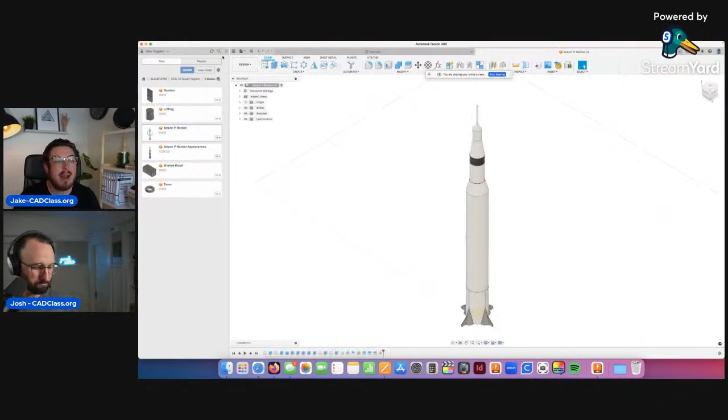So I'm just going to pull up the Saturn V rocket - that'll be in chapter 0. Let's get started. I believe what they were asking about was when we're making the sketch of the fin down here. I'm not quite sure which sketch it is, I believe it's that one. There we go.

So when they were doing their sketch, they noticed that with two vertical dimensions, sometimes the number is on the left-hand side and sometimes on the right. Anytime you're making sketches you'll give to other people, or that you may review in a year's time, you want everything as neat, tidy, and organized as possible, so you don't have a random sketch that's hard to read. With horizontal dimensions they face the right way, but vertical ones look a little skewed left and right. So what's going on with this?

I actually don't know about this, and I recommended they rotate their entire view and try it again. But I haven't done it myself, and I figured this would be a fantastic live experiment. There are always tiny tips and tricks in Fusion that I have no idea about, so we may as well do it on a podcast.

I'm going to delete this 26mm dimension, then close the sketch palette because nobody uses it. This may be a little trick if you don't know about it: if you go up to the view cube, there's a house icon, but there are also arrows where you can click and rotate your view, which is nice.

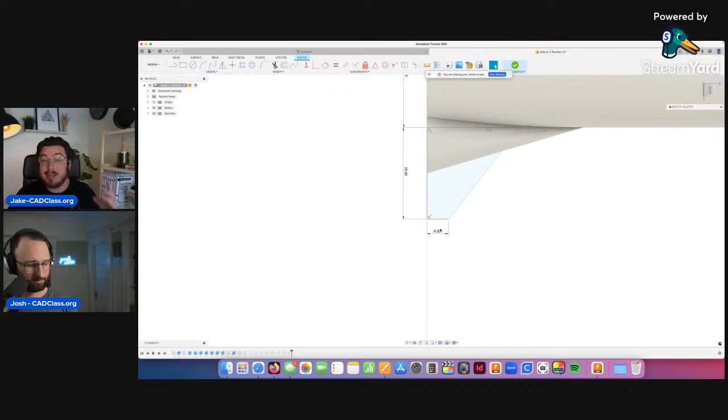What I was recommended is to flick the view over, so now your number is horizontal in the right dimension. Let's try this out - hopefully when we flip the view back, it should stay. Let's move this down to 26, hit enter, then click back the other way... it flips over. Really strange. Let's try that for the 6, see if it does anything. This is something I have absolutely no idea why it does this. Weirdest thing - can you think of what happened, Josh?

What? No, I don't know either. It just flicks, super strange. Obviously it doesn't affect the sketch or the dimensions of the CAD at all, but really, really weird. Very strange, right? Yeah, I don't know what's up with that.

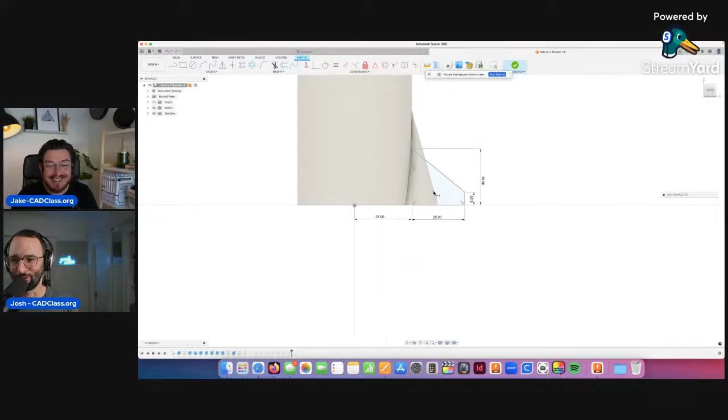But it did kind of lead us to eventually making a bit more of a YouTube video about this content. There's a bunch of tools in the ViewCube that a lot of people don't utilize as much as they should, so I figured we'll spend a little time going over a bunch of the different tools in here that maybe you don't know about.

Going over. So obviously, when you look at the view cube, you can click the little house icon to get isometric view. This is the view you want to go to when you're going from a 2D sketch to a 3D object. If you imagine extruding a square and looking directly downwards, you have no idea if it's exactly the dimension you want, or if you accidentally double-clicked a number and it's now gigantic, because looking straight down it looks exactly the same. But if you look at it at this isometric view, it's way easier to see the scale of things.

That's pretty common. Then a lot of people know that you can click all the words on here. So if you want to click where it says front, it will give you a front view. That's pretty obvious. You can also click on the edges of our view cube, and you can also click on the corners.

Like I said before, you can also click on the arrows to change your view. This top arrow is going to be pointing to the top, so it does the exact same thing, and you can click between them. I think a lot of people know these.

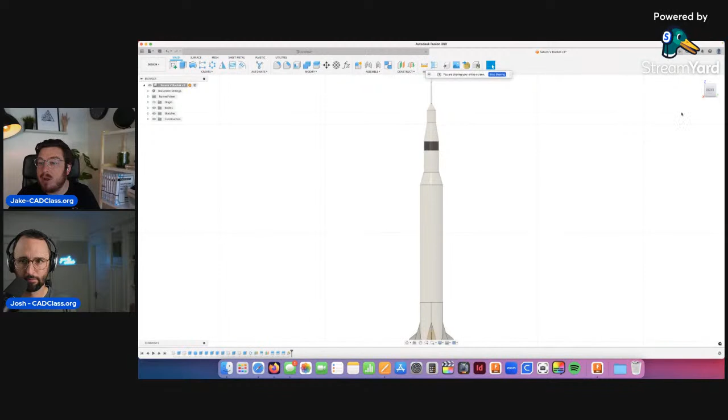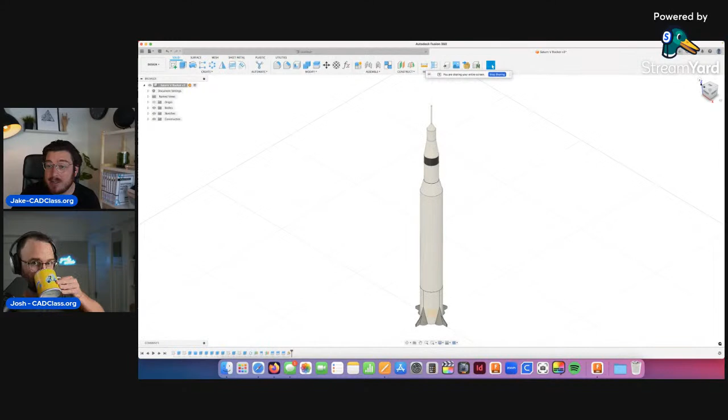But what not a lot of people realize is there's this little pull-down arrow right here that's got a bunch of extra stuff on there as well. So go home - again, this does the same thing as the home button, but you can also change that. You can reassign that shortcut location. So if I want to change my home view to something like that for whatever reason, you can go into the view cube and say, I would like to set the current view as home.

And I can say, yeah, from a fixed distance. So every single time that I move this and click that home view, I'm now put back to that view. There's not a ton of reasons why you'd want to do this over and over again, but it is a handy little tool. What else is in there?

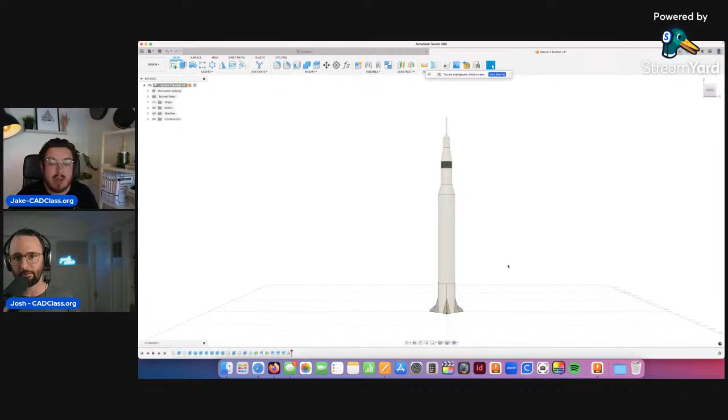Go home, like we said. You can change your view, so you can change between orthographic and perspective, which is kind of funky. Anytime you're talking about a perspective, it's a little bit more realistic. We go over it more in the rendering and appearance workspace, but it's when things further away actually curve either inward or outward, just like they do in real life.

Not super duper good for when you're doing engineering drawings where things have to look nice, neat and square. But it's a little easier to see like this - you can see the bottom is actually bulging downwards. But if I change our view over to orthographic, then everything is nice, neat and square. So this is a really easy trick if you're ever in the rendering workspace and you want things to look just a little bit more realistic.

You can add that bulging effect by changing your camera to perspective, and then it looks a little bit more realistic to how it would in real life. But yeah, love it.

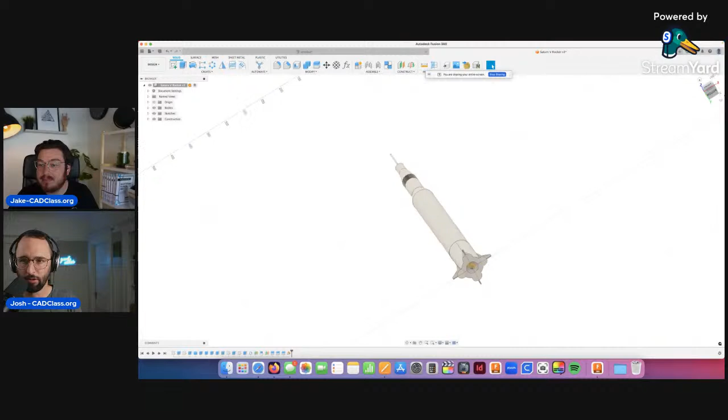Another reminder that especially when you're new, click around all the tools, and especially the ones that you use all the time. I think one of the pitfalls that's easy to make with anything is, oh well, I now know how that works, let me just move on to the next thing.

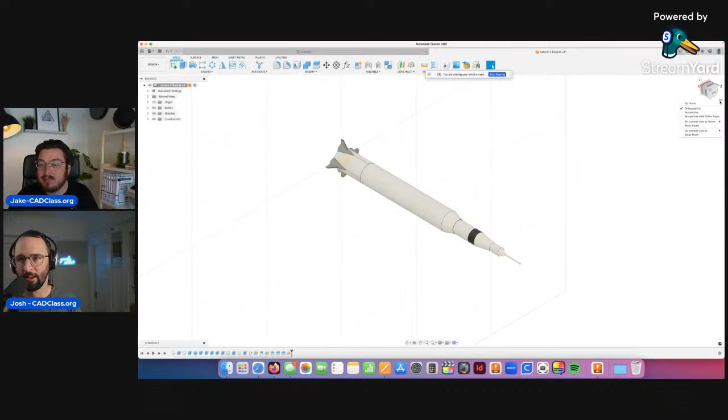And I get that, right? There's just too much information to learn, but don't forget to play around with those tools. I'm constantly learning new software and updates, and I'll just click on random stuff and learn the most strange things here and there. So keep on learning. It's such a general phrase, but click anywhere, right click anywhere as well. There's a bunch of random new tools all the time.

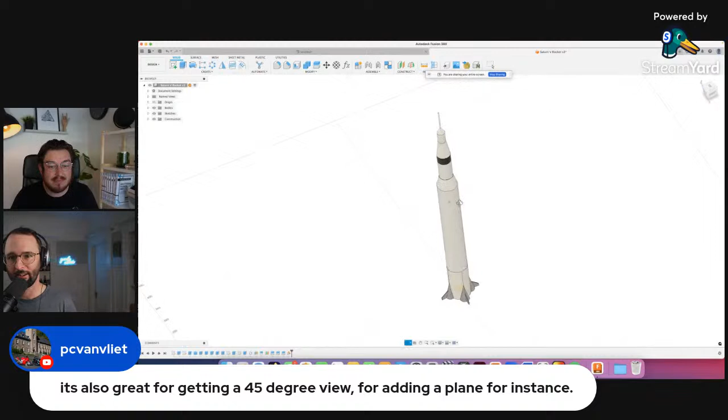I did see that. So for you guys that are brand new to the CAD world, there's actually a CAD mouse specifically for dealing with orbiting and zooming in. It's called the Space Mouse. I have no idea what company makes it, I just know that's the product name. They make it in a bunch of different sizes, but I've never used it. Of what I've heard from CAD people, it is phenomenal.

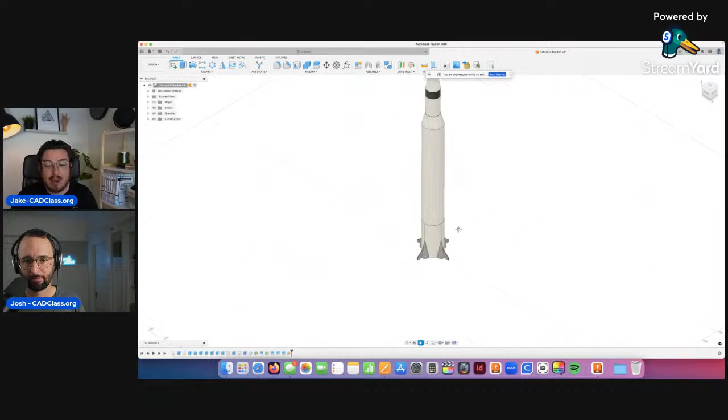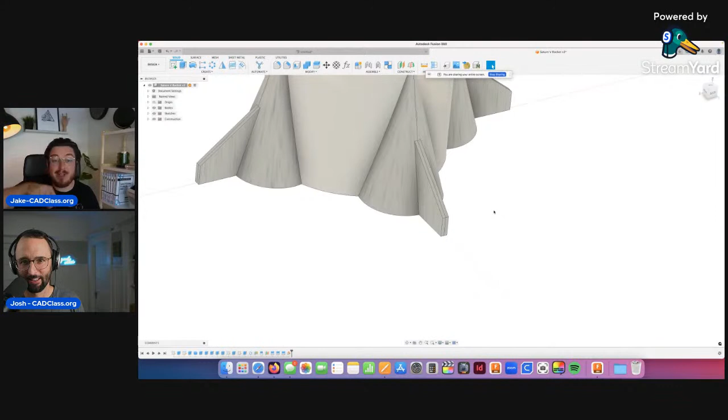If you're in your home view and want to zoom onto this back fin, I'd have to move it to the center of my stage, zoom in a little, and then orbit around - that's the 3-part viewing you'd have to do. With the Space Mouse, it's got downward, spinning, and orbiting features, and you're able to do that all in one function. There's a bit of a learning curve, but apparently you can just flick your wrist and look at anything at any zoom and any angle. Of what I've heard from CAD people, it's absolutely fantastic. But I've always just liked a super duper normal mouse - I'm fast enough at it that I don't really need to mess around with it too much.

Who knows, I believe they just added functionality to Mac OS to use the Space Mouse now. So I've seen people use it, and the people who use it swear by it. Definitely, they really swear by it. It says so right here - apparently it's called 3Dconnexion, however you say that. Sounds about right. And then Patrick here says it's a great bit of kit, takes a little time to get used to.

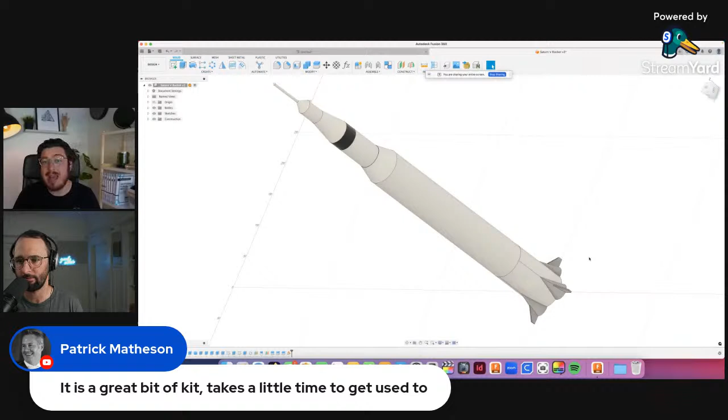Yeah, that makes a lot of sense. It says it's a bit on the spendy side, would love to try once I learn a little more. Neither Jake nor I use it, not to say that should prevent you from getting it, but it's not necessary for a while. It's a bit on the spendy side - we're probably at the stage where that'd be fantastic. But any software, tools, or accessories we recommend to people should be something reasonably affordable and accessible to someone who's brand new to it. Saying to someone who's just downloading free software that they need to go get this $100-$200 mouse - that's not super cool.

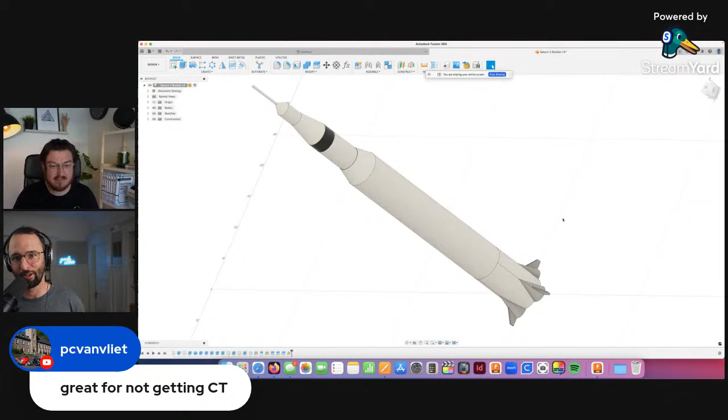PC Van Vliet says it's great for not getting carpal tunnel. I think if you're playing around on computers as much as we are, that's definitely a very real concern. And $100 for a wrist-saving device doesn't seem so crazy when viewed through that lens, compared to the surgery required to fix your carpal tunnel.

I've seen a bunch of people use trackballs, the trackball mouse. Those drive me crazy, I can't believe that's possible. It makes me think of my grandmother's laptop - yeah, I had a buddy in college who had a laptop that was gigantic, something like an 18-inch screen.

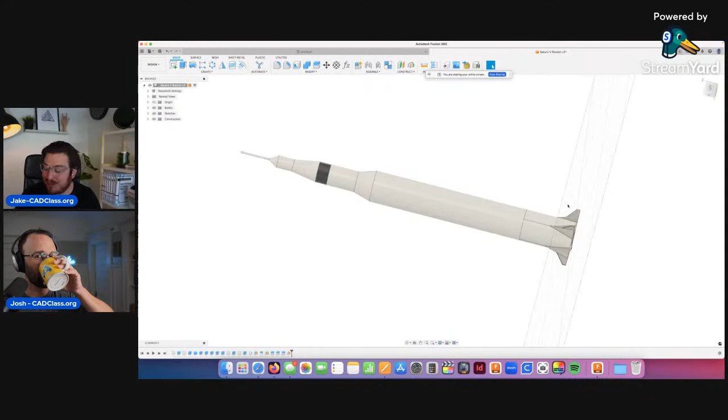And just the power brick alone was like that big. It was ridiculous. His backpack just had his laptop and charger in it, that's it, and it weighed a ton. He would just plonk his mouse on the corner of it and use the trackball. I tried it and I hate it, absolutely hate it. He's like, nah, it's easy when you get used to it. I'm like, dude, my thumb is cramping up and I use it in 2 seconds. Drives me crazy.

Well, good tips on the ViewCube. People that like it, yeah, they really do like it.

I believe this is a problem - I've tried over and over again to reattach the points and make the warning signs go away, but I could never figure out what Fusion's problem was. Usually anytime you've got these little warning symbols, it's in order of operation, or you might be clicking in slightly the wrong area. Usually just deleting it and going back fixes it. But for this person, that wasn't a solution.

But then Vassal is responding. He said, hope this will help, sorry for the recording app, it is free. When you make the dimension and the origin green circles appear, then hit click. I'm sure his video makes perfect sense. My point here is I didn't entirely know how to help solve that issue, but also how cool is it that our community is making videos for other people? Just totally amazing.

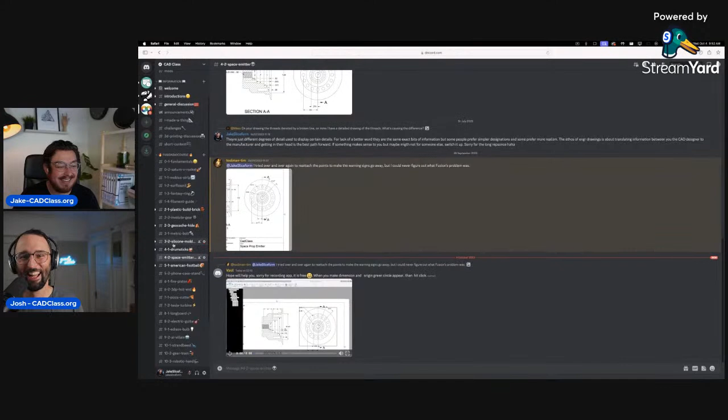Hey guys, I really need to set an alarm for this show. Sam, wait, what time zone are you in, Sam? Alarm, what are you talking about? 9:30 - oh, maybe just a reminder alarm, not a wake up alarm.

That's hilarious. So Sam, thanks for joining us. By the way, Sam was one of our first testers, Eastern time. Sam was one of our beta testers on Reddit way back in the day when we were building out the course, and now has left us a beautiful review about our book on Amazon, and has continued to be a big supporter of this community. Also, a car guy, building out some windshield wiper motor parts was one of the things he was working on. So nice to have you, Sam, nice to see you back again.

I guess Aaron says maybe he works the graveyard shift like I do. Yeah, Aaron is from Alaska, for those of you who don't know. The work hours there are a little bit different than the rest of the world, I would say.

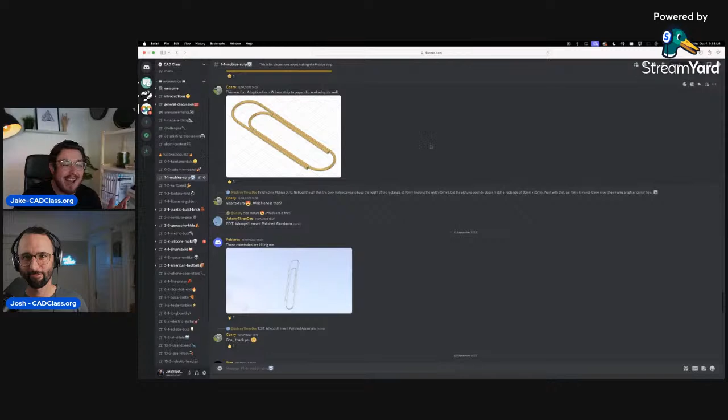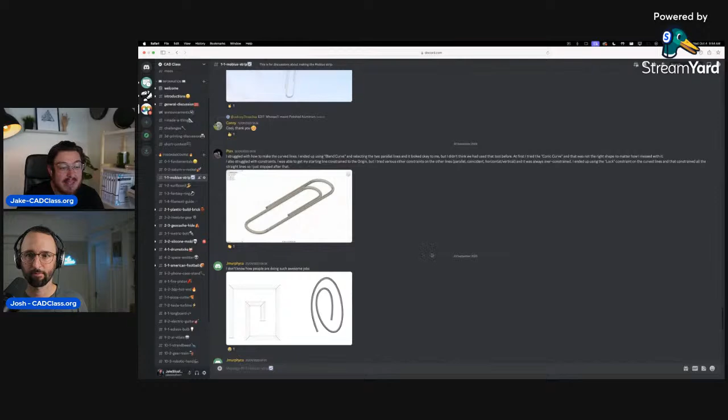Okay, so the centerline trick - do we want to talk about the filament guide, the centerline trick? Really quick, before we go on, we had a little meeting yesterday with a bunch of really groovy people in the Creator CAD environment, who were going through our book and our course. And what they were saying is that this paperclip trick was one of their favorite challenges they did. I think we've talked about it a bunch on this pod, where I say it's a good challenge but the actual object itself, the paperclip, isn't super duper exciting. But from what we've heard from the community, people love this project, and what they like is that there's so many different ways to do it. They were going through the Discord when they needed help, and everyone found a slightly different solution to what to do.

It really rings true to all of the different parts of CAD, that there's more than one way to skin a cat, as morbid and creepy of an expression as that is. There is no one perfect way to do it. There's usually dozens and dozens of different ways to do the exact same thing. The fact that all of these people have found different ways to do the same thing is awesome.

Super duper cool. Do you want to talk about a couple of those ways, or does that ruin it for some people? I think it'll ruin it. I want them to go through the Discord and kind of learn it.

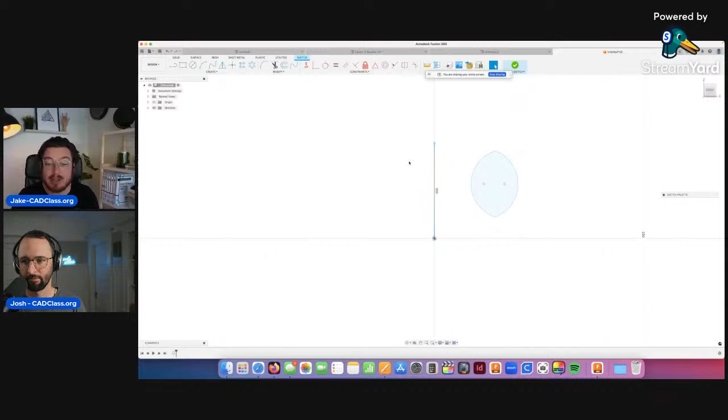So if I go and try and add some dimensions onto this - if I say this is 40 millimeters in radius, this one 25, for example, this is 50 millimeters tall, I'm just throwing out random dimensions on this - and let's say that is 35 millimeters up. What else? This needs some radii here.

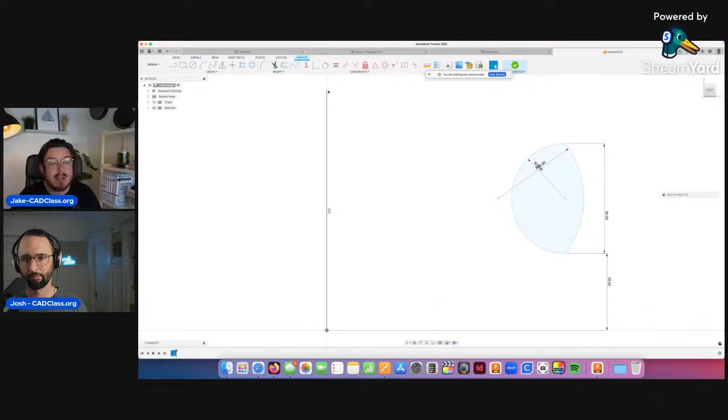So the trick is that if you just treat this as a totally normal line, anytime you are adding dimensions to it, it's obviously going to be - if I make this 80, this is kind of just going to be a radius dimension. But the trick is that if you wanted to actually type in the diameter of this, because you know it's going to be revolved, then you actually need to change this. This is a normal line, and we're going to be changing this by opening up the sketch palette, by clicking on that line.

We're going to be changing this to a center line. You can see this kind of dash-dot style. So it knows that this is going to be the axis of revolution, so anything that you dimension from it is now going to be a diameter. So you can see this was an 80 mil radius - obviously that's 160 diameter, and it's the exact same thing.

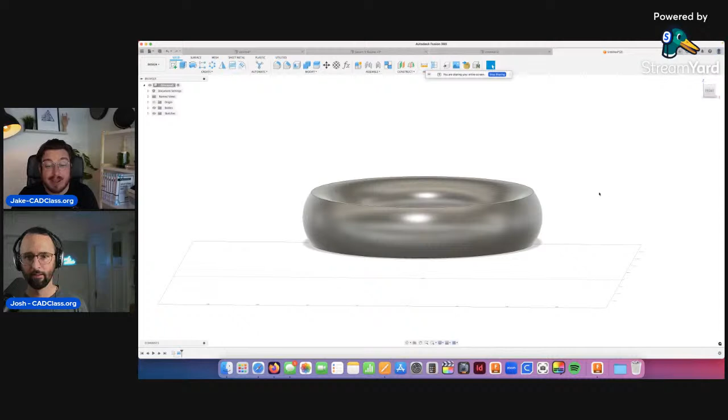The nice thing about that is when you go into the Revolve tool, not only does it automatically set or click the profile because there is only one profile, but you've already set this as an axis of revolution, so it's already selected it as the axis. It's done all the work for you. All you do is click OK, and this kind of funky ring shape is done.

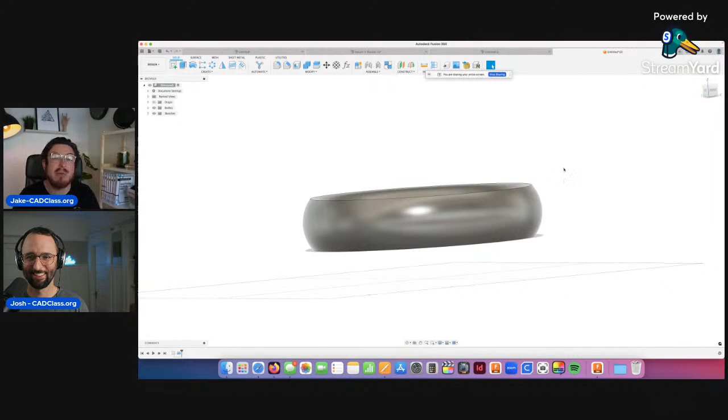So if you're making the fantasy ring, the project before in Chapter 1, all of the dimensions that we have to that center line are radii. But obviously, when you're dealing with actual rings, nobody knows the distance from the outside of the finger to the center - that's always going to be a diameter. This is exactly how you would put it in there. Just a little bit of information about that.

Home run. PC Van Fleet says, Jake with the gold again. Pure gold. Nice little ring analogy there too.

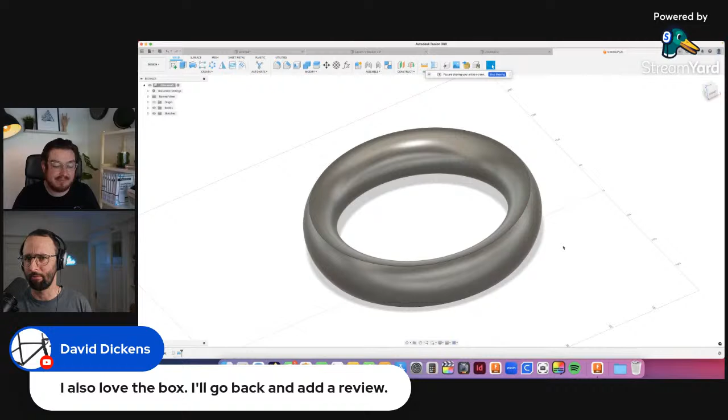David Dickens said hello from Ireland, and that he also loves the box. I'll go back and add a review. Oh, thank you very much. The silicone box, I imagine they're talking about. Was that you, David? Somebody had silicone molded something. Oh, that was something we should shout out. Let's definitely shout that out. So somebody actually went out and made a silicone mold. Was that you? He also says he loves the book.

That wasn't the box, but hey, it reminded us of another project that was amazing. This project is so cool. Did we talk about this last week? We have not talked about this. So this, I think, is Chapter 3.2.

You can essentially cut out any object that you want from this kind of block. And if you say this block is silicone, it has some physical features, it has some density built into it, then you know exactly how much silicone you need. Silicone's kind of an expensive material.

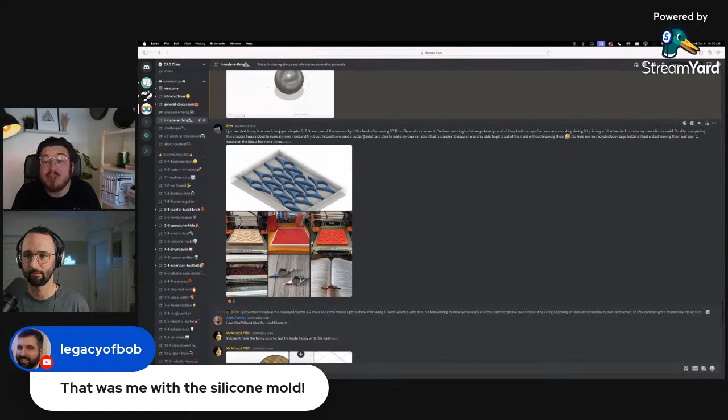And so you can save some money so you don't overmix more silicone than you actually need. And it's a pretty simple project. It's kind of just getting you into the vibe of what is a component, how can you import objects from Thingiverse, how can you convert and mesh them using the combined cut tool. It's got a bunch of little tiny tricks in there.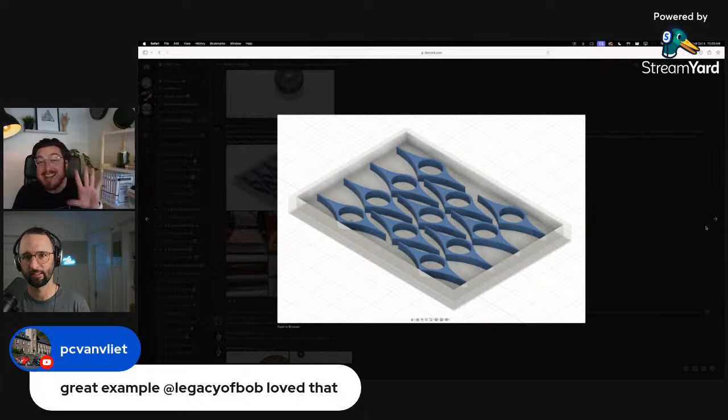But he's actually taken this and used it in a real project. So it looks like he's made these really awesome book closers, which I need to make some. My fiance is a huge bookworm. He's actually taken this 3D object, made not only the object that you're printing, the buck, but also made a little area for this so the silicone doesn't leak out. So he's made the molding box as well.

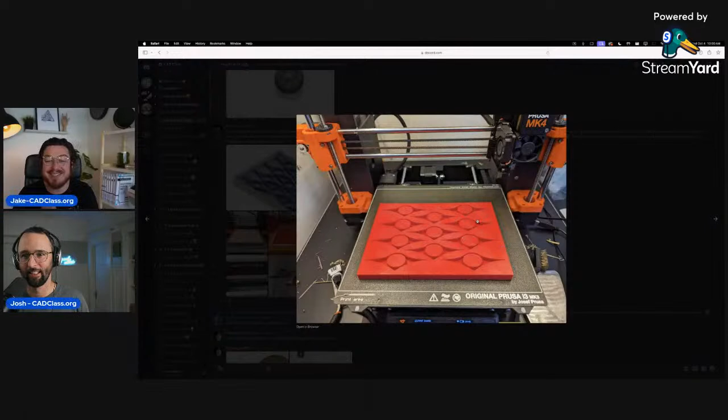Filled it with silicone, let it cure, popped it out. I actually really dig that you can see all of the printer lines on there because silicone picks up the tiniest details. I love it.

And then melted in some old little bits of plastic filaments. This little toaster oven melts in there, and then at the very end, they all come together and pop out. I love this so much.

I also do, because I think it's such an obvious answer to what do I do with that leftover filament, which everybody asks. So as soon as I saw this project, I was like, oh yeah, that's exactly what you do. You make a mold and you just heat it up. Love this so much.

He said, in Legacy of Bob, I want to point out this comment too. He said, I should have realized that the model would be a little too thin to work, but now that I'm getting better at CAD, I plan to make my own model that's thicker.

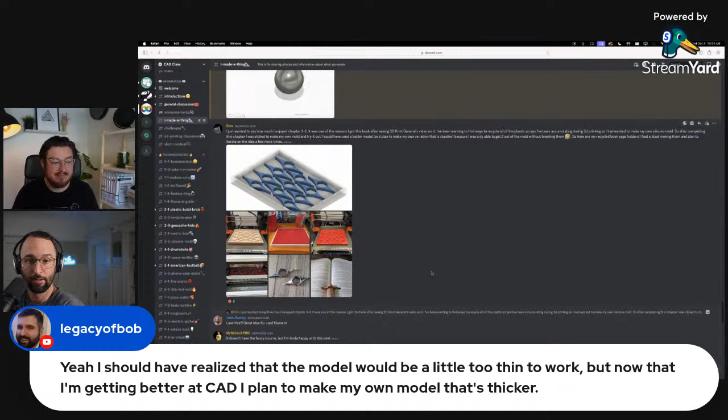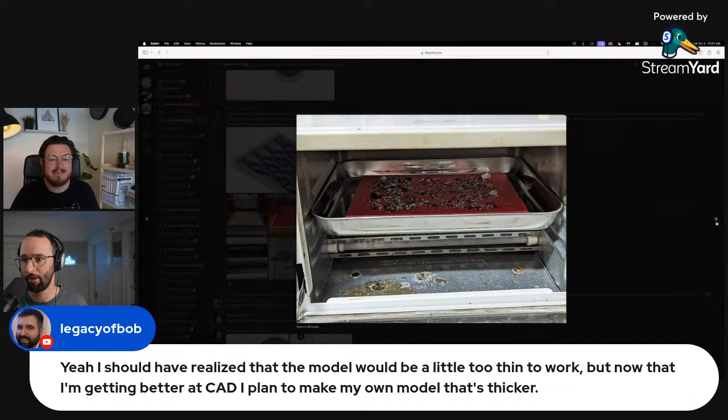So awesome, you should definitely do that. And also, I love this comment because that's the product development process. You have to try it to figure out what works and what doesn't. That's part of the whole deal. So kudos to you, thanks for showing up today, and hats off. We love shouting out projects like this. So keep up the amazing work, and let us know when you get that model right, because we'd probably like to make it as well.

And this is a project I could see adding into schools, and this is one of those ones I could very much see using. I actually think so, we work with the local museum. I think they would love this project.

Can you imagine? There's a bunch of projects like this where you can melt down plastic to reuse it. PLA is an obvious one because it's such a low melting plastic. But I've seen people use, oh gosh, I'm totally forgetting the name of it, plastic 2. It's the plastic material that you get on milk jugs and mustard containers and detergent, where it's kind of slick, but it's got kind of a grit to it as well. That's a super low melting point, and you can melt it, pour it into a mold, let it cure, and you can do it over and over and over again. And it's a super slick material.

So I've actually seen the YouTuber Peter Brown. If you guys are into woodworking or silicone molding or resin or anything like that, you absolutely need to subscribe to him. He's amazing. And he was like, oh, this is fantastic, I'm going to make really low friction runners for my table saw for a ton of sleds and jigs that I'm going to build onto it. I'm like, that's awesome. So I guarantee this would be fantastic for it as well.

A word from pcvanvliet reminding us, by the way, don't ruin your oven with plastic.

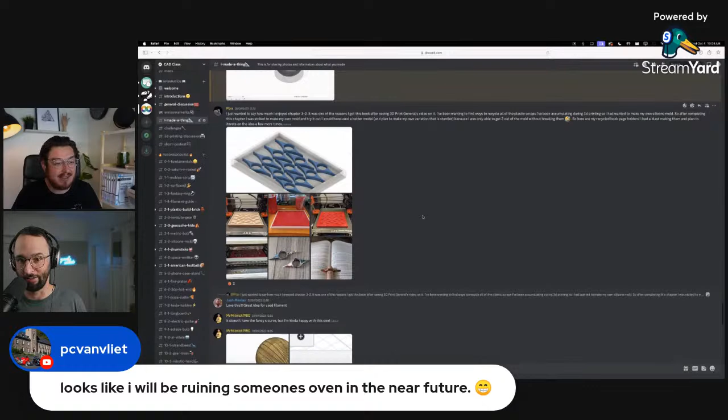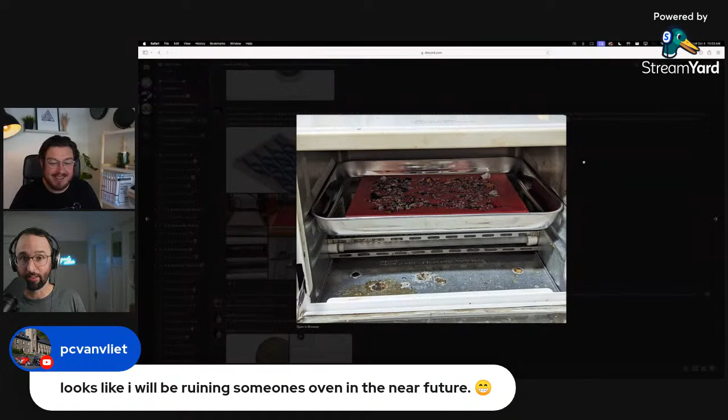That would be a nightmare. So you can see he's got this nice big tray here, and it's in a tray as well. It's in a toaster oven, so not the full oven. Just be very careful if you decide to do something like this. Too many of those gooey disasters will ruin your oven.

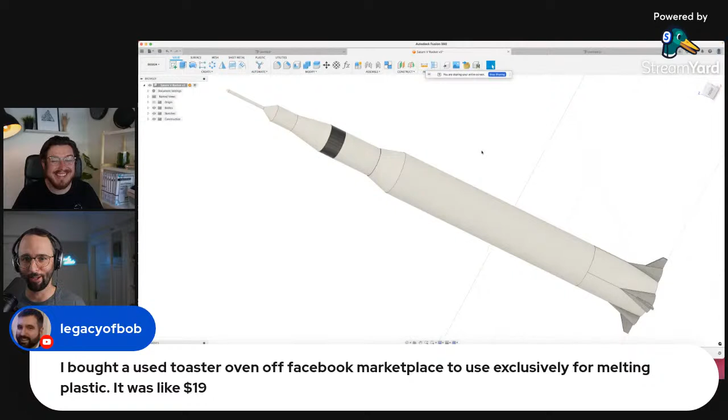Legacy of Bob says, I bought a used toaster oven off of Facebook. Yep, perfect, like $19, exactly. That $19 is like the investment in the mouse that saves your wrist that you might eventually have to have surgery on. You just saved yourself a bunch of money by buying that.

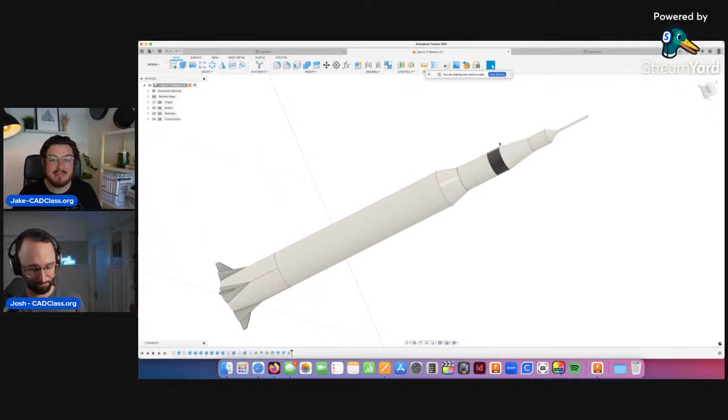On the non-CAD side, kind of funny, I'll mention this briefly because this is too much about us. I spoke at City Council last night, and I got to go up and present. I can't say anything about why I spoke at City Council, but there's some good stuff coming down the line, and it should be announced probably by next week. I got to speak about something I'm really excited about: innovation CAD, some of our Fusion programs getting potentially incorporated into the city of Sacramento. A huge shout out to the city of Sacramento, to the folks who made that happen, and to the community here that's been completely amazing for CAD class.

There's actually a video on the website we tweeted out a link to. It's just a photo of me standing up there doing the talking. I only talk for about a minute, thanking people and talking about the future of innovation briefly. Super fun, and we're excited to continue to gain momentum here. The more people that come into this community and make comments, the better we all are, and the more that Jake and I can focus on making more tutorials and getting better at what we do, so hopefully you guys can bring your ideas to life.

Super awesome. Aaron asks a good question: I found working with the decals on the Saturn V rather cumbersome, do you have any tips for using those? We did talk about this a little bit last week, but we can talk about it again. Decals in Fusion is the idea that you can take an image, anything you want, PNG, JPEG, and stick it onto any object.

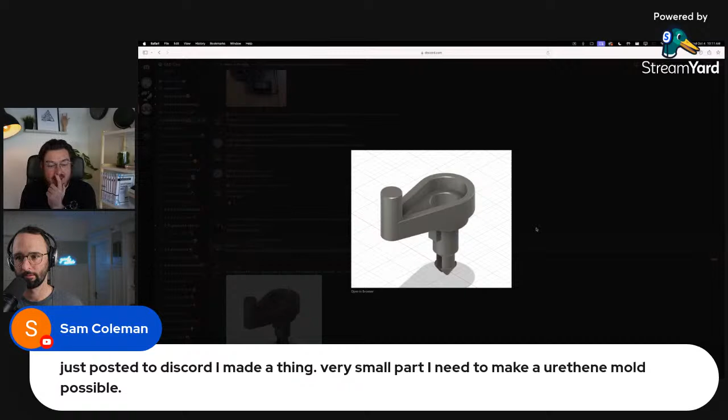A funny little part to CAD - now I have to figure out the best way to make it for a mid-80s Ford wiper motor. Ooh, that's a very good small part. Okay, I need to make a urethane mold. I'm imagining this is going to be molded with a hard plastic, so I would actually make this as a 3-part mold instead of just a 2-part mold, which is slightly more difficult.

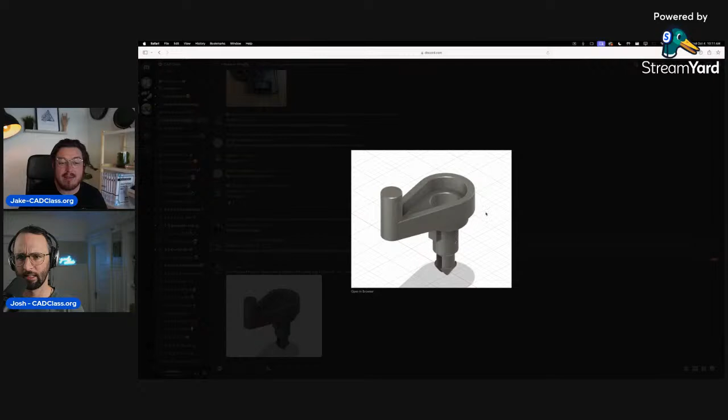Actually, it's a good amount more difficult, but it's something that you can absolutely do, Sam. What I kind of think of when I look at all these shapes is I try and look at all of these edges and then any of the volume above if there's no undercuts to it.

So when I look at this, there's obviously this kind of surface under there where that could be a parting line, and all this material above could just pull away. That's fine. But then looking at all the objects downward, because that's the direction your mold would pull off, you actually have this undercut right there, so obviously that wouldn't work.

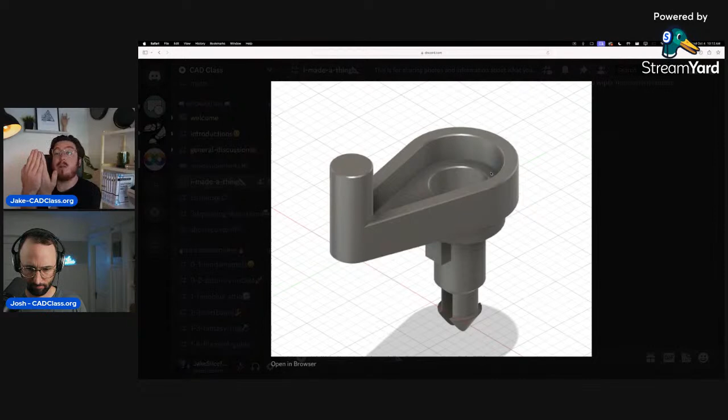But if you then look at the cross section this way that goes down the center, 90 degrees to that parting line, you would actually have a mold top section and then two, front and back, that come apart. So if you want to send me the file right now, Sam, we can cut this up very simply.

Yeah, he said, but this is... Can I share the Fusion file? Yes, you can, absolutely. Has he already shared a file with us before? Well, I guess you could probably share it on the Discord. Is it there? Oh, great. Yep.

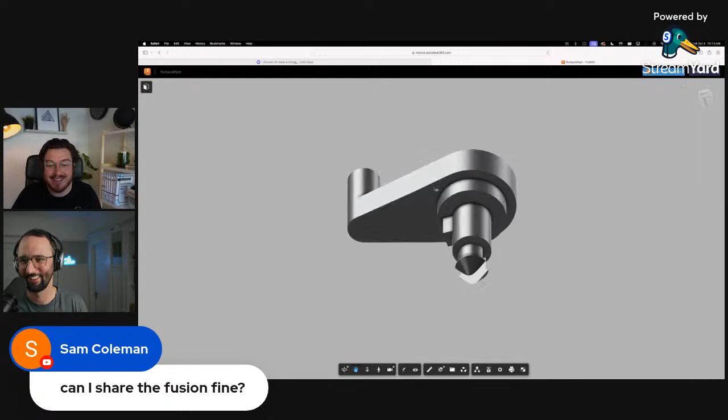That's awesome. Groovy. Yeah, God, I love Fusion so much. We could just send the file. Yeah, absolutely.

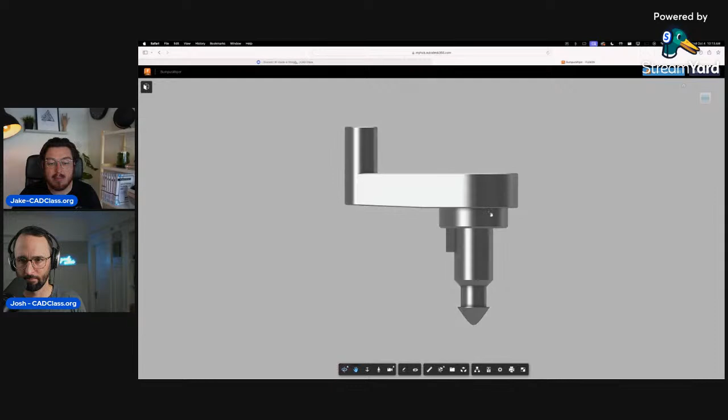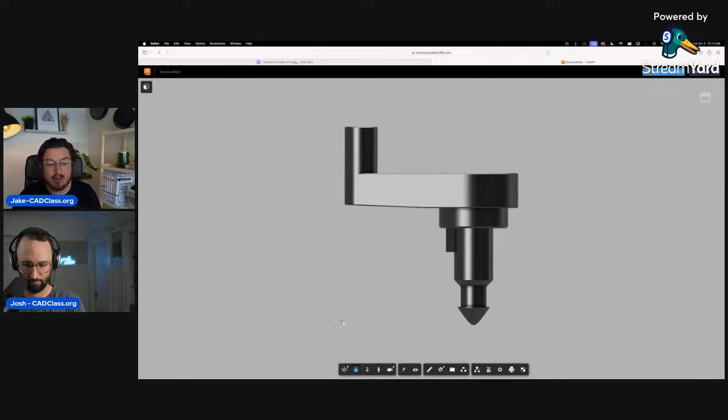So what I would do is make a parting line right at this horizontal line that comes up. And then I would make another parting line that goes from this point downwards. Then you've got this rectangle right there, and another rectangle right there, and then the top of the mold up top. I think that would work really well for you, just because then they can crack away.

And anytime you're working with this, you can actually 3D print the negative of this as the mold encasing, which is really great. Then you can do a bunch of positive and negative molds to get the final negative out of silicone. But this would be a fantastic project to do. I can see that being really awesome.

This is obviously a car part if it's coming from Sam. Yeah, and I was just reminded, yeah, it's definitely... he said it's a wiper motor, something like that.

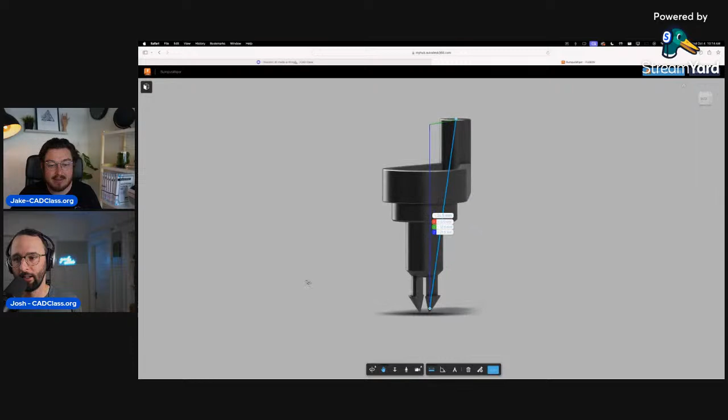Decent chance, yeah. You forget a lot quickly too, though. So no, not Sam, I do. Yeah, it's true, Sam's using it quite a bit, it looks like. So that's awesome, congrats Sam. We'd love to see the progress as you go. God, that's awesome, I love seeing stuff like that.

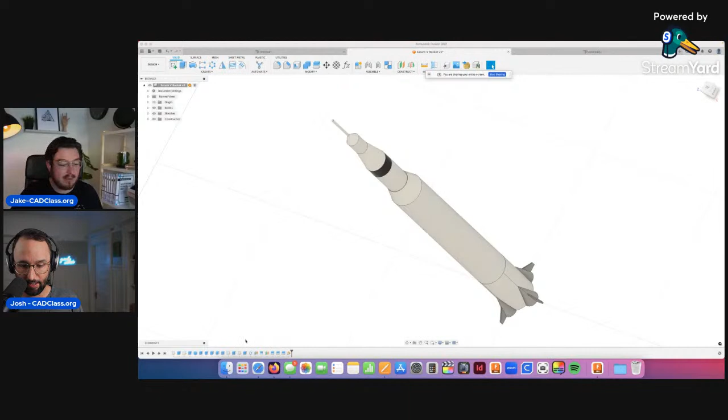We did have a question in the surfboard section, and I'm wondering if they got it answered yet. It says, okay, I took a crack at the bottle making. Here's my question though: after doing the loft to create the design, is there a way to hollow the inside to a set diameter? Or do I need to set my initial design to use multiple circles or shapes at say 2 millimeters thickness and then do the loft feature?

So there's more than one way to skin a cat. For this bottle idea, there's actually two main ways that I would go about it. One of the parts of CAD that you're trying to get to is that you have as few features in your timeline as possible.

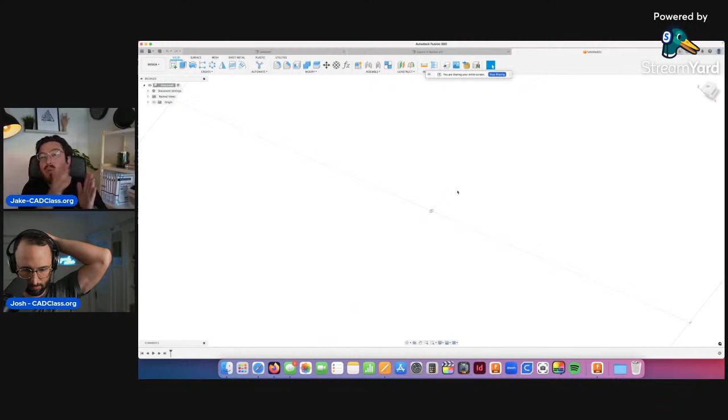Let's work from the lofting tool that we do in the project, which will take many features, and then we'll whittle down until we're only using 2 features to make the bottle. So with the bottle, let's say we'll use 4 circles and 4 planes. Does that sound about right?

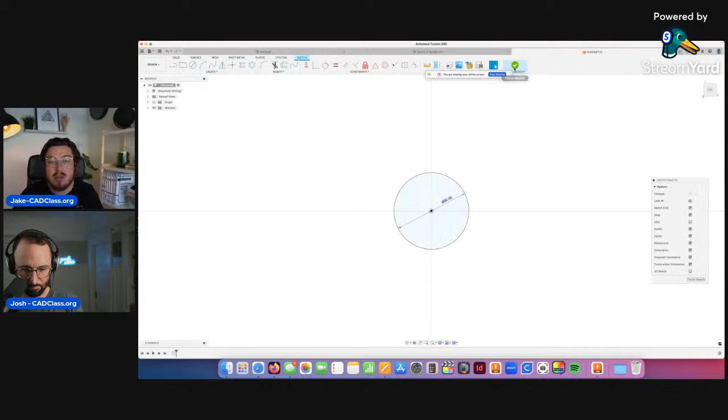Let's say if I make a circle on this bottom thing that is 50 millimeters tall, and then I'll make another plane. How tall is a Coke bottle, would you say, Josh? Probably about an 8 inch. Maybe a little bigger, 200 mil sounds about right. Yeah, whatever. I don't believe Josh has had a bottle of Coke in 20 years. That's correct, yeah.

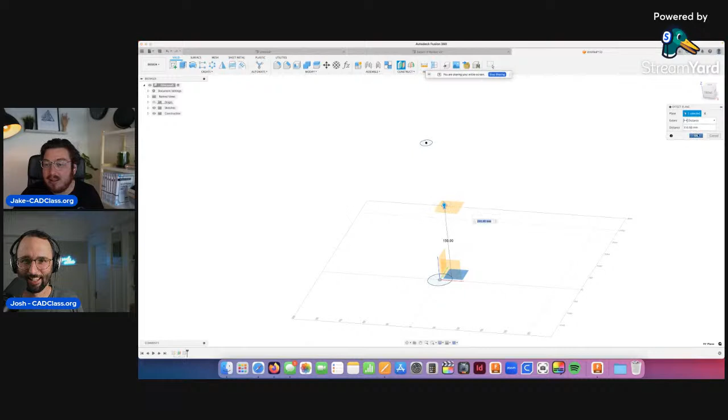So I'm just going to be making a couple circles that are elevated from each other. If you guys have worked on the surfboard project, then this is all looking fairly familiar, obviously a little out of order though. Make another one there, and I am making this up as I go along.

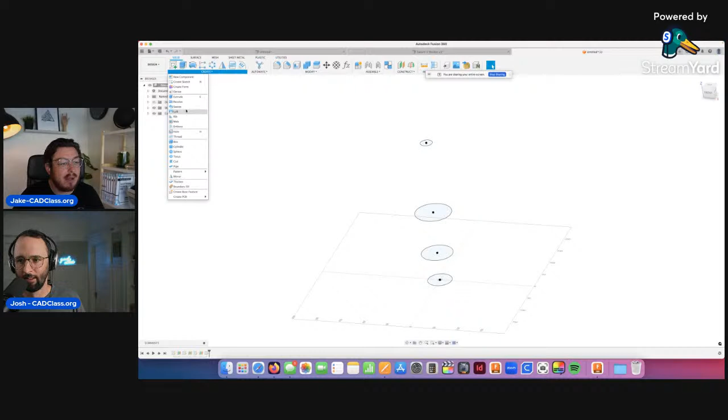This is obviously not exactly what it's supposed to look like. But the groovy thing about lofts is you can actually add in rails right here. A rail is essentially a curve that will follow the curvature, but you just need to make sure the rail passes through all these. So obviously this is not looking quite like a Coke bottle.

So let's change that. Let's go into a sketch, and I'm going to make it perpendicular to all these, and then I'm just going to be projecting all those circles right here so they will pop up on our plane. You can see I'm going to pull in a fit point spline, and I'm just clicking on the outside of these curves. The big part of a rail is that it intersects all of these points perfectly.

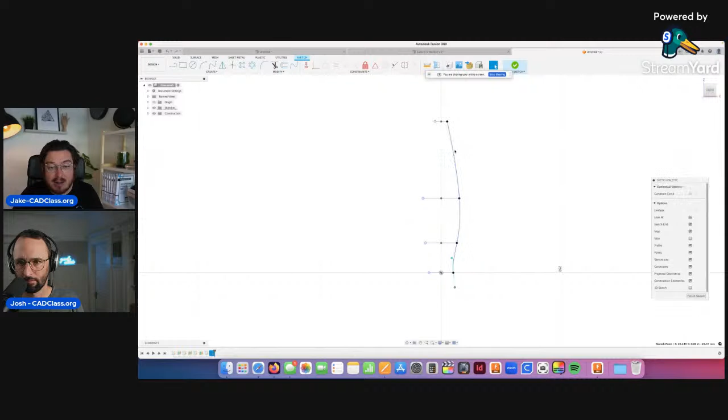As you can see, this actually looks identical to our loft that we had. So I'm going to play around with all these vertices just a little bit together. Yeah, I don't even know what this is. I know there's a word for what those movable bars are, but I don't know. I've said vertices for so long, it just kind of is what it is.

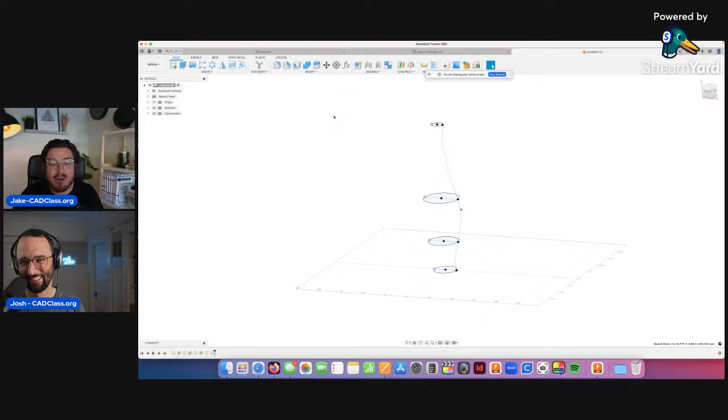All right, so we've now got our rail that looks a little bit closer. Oh, I have no idea why that happens. All right, so now again let's click on our 4 profiles. Oh whoops, but one of the things I accidentally selected already was that rail, so we don't want any of that.

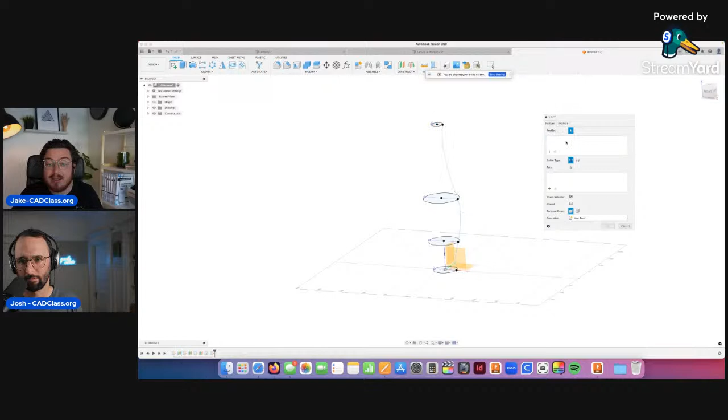So I would like to start from the bottom, that usually helps, so you go from the bottom upwards. And then the rail, we can click on there. It's looking a little funky, let's see how I can fix this.

Oh, I can actually fix this by mirroring that to the other side. What do you mean fixing it? That was perfect, it's exactly like a Coke bottle. Yeah, 100%, yeah, definitely.

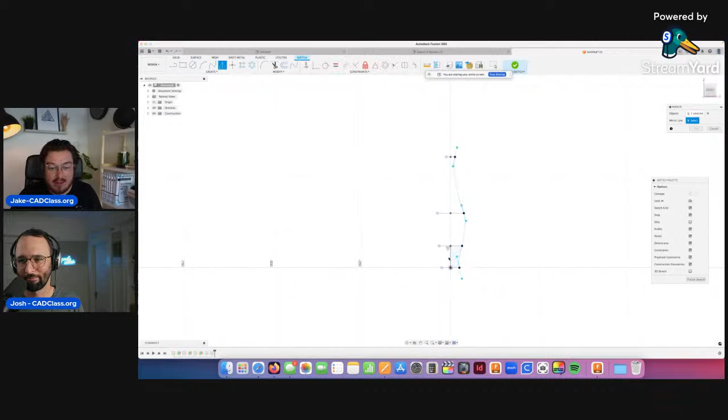Bezier control points, or Bezier, I'm not sure, Bezier, that's it. Oh wait, no, I want to mirror, excuse me. So you can see this is actually taking a lot of time to get this looking right. It's not the fastest operation, but it does utilize what we learned.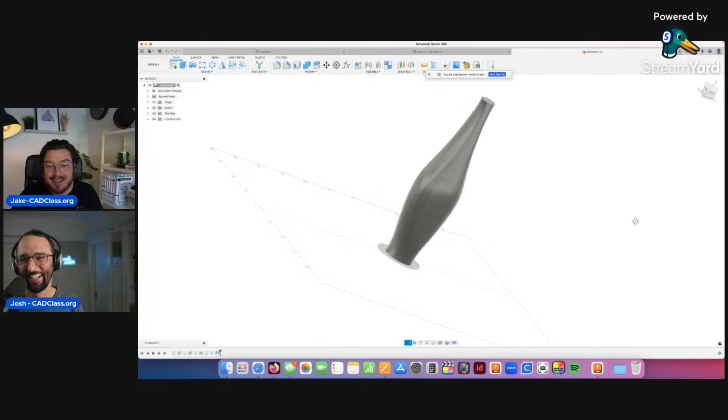There we go, there we go, that's looking a little bit... exactly, yeah, it looks just like a Coke bottle. Yeah, as you can see, it's not exactly... that's right, awesome, that's awesome.

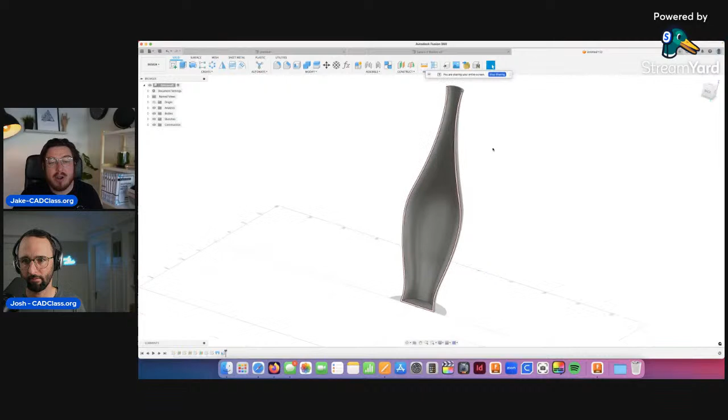Obviously, it is going to be solid, is the real trick. But for this, the trick to make it hollow is just select that top surface, and then if we peek inside, there you go. Then we've got an open container at the very top, and even hollow walls all the way around.

But that's one of the less than perfect ways you could use to make that. The other way to do it, that we would actually recommend, is to make a revolved plane or a revolved profile.

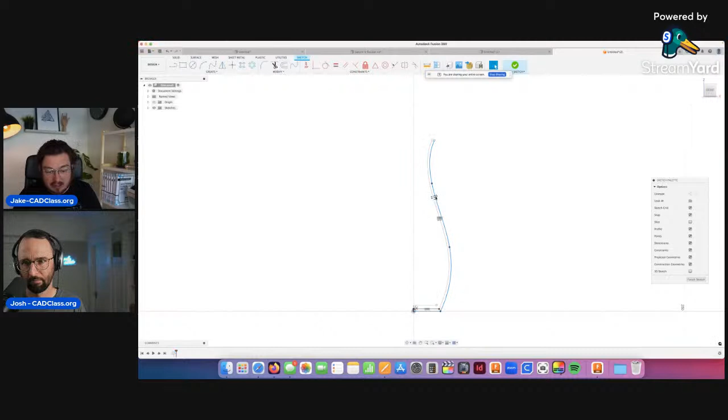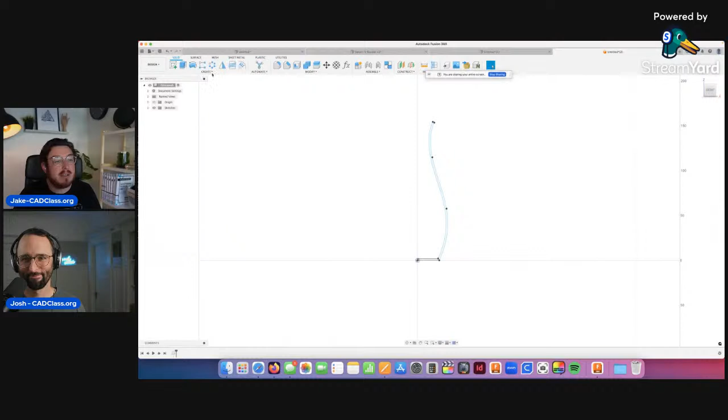So if we just make the base, the bottom surface right there, and add in some fit point splines—again we can just use 4 of them—and click OK, then I can mess around with these Bezier curves. That looks just fine. I can offset this to have, let's say, 2 millimeter thickness. Use the line tool to connect this. I'm looking for the inside to be a solid color. Oh perfect, I can just trim off these bits then. So if you click the inside and it turns that nice sky blue, that's perfect. Then I can go into my revolve and select that line as the axis, and it looks identical to the other one in every single way. It's perfect.

It reminds me of a project I still have in my head that I want to do—making a vase that a speaker sits down inside of, to hide the 2 speakers that typically sit next to the TV. The nice thing about a cavity like that is it has enough volume to help with the bass side of speakers. I'd still like to hide some speakers inside a vase using a design not too dissimilar to what you just made. I feel like that would be really bassy. No, it wouldn't—you need so much volume of air to actually hide speakers that way.

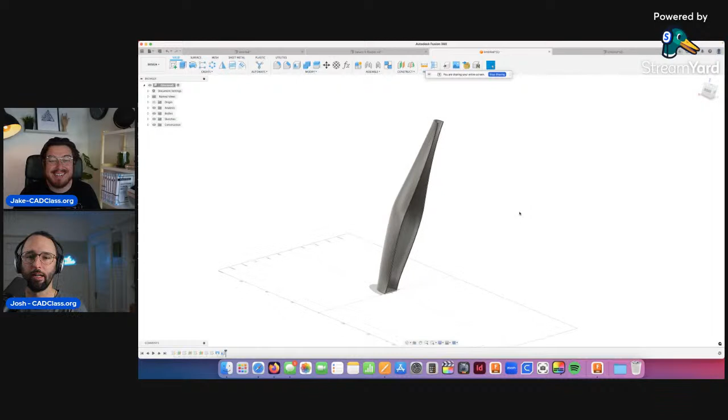So push back and forth—yeah, like if you're installing a subwoofer in a car, you need the more space the better, but there are some formulas that spell it out. So even then, I think it would be pretty tiny.

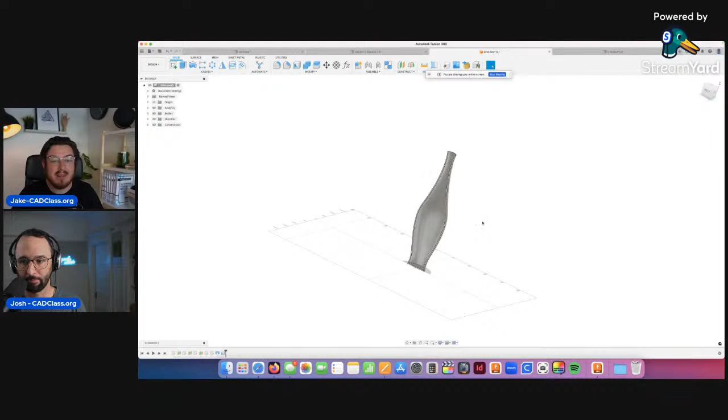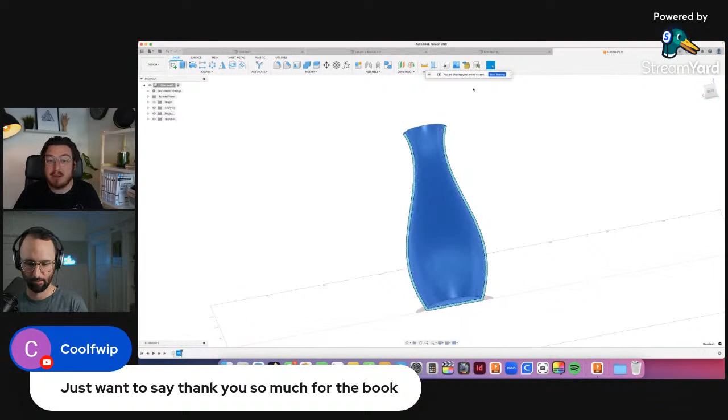The last thing to say about this is that the scales and dimensions are slightly different between these two, but they're topologically completely identical. In this option, as you can see in the bottom left, we only have 2 features to make this object. But if we go into the first one, where we use the offset plane and sketches, then loft, then shell it, and use multiple rails, you've got way more features in your timeline to get essentially the exact same thing. So in some scenarios, lofting makes absolutely perfect sense. In other scenarios, if you know it's going to be a perfectly rotationally symmetric object, using the revolve tool is not only faster, but your timeline is way smaller—so if you need to make edits, more of the information is in one location, making it even faster. So this is just the different ways to do it—one way isn't necessarily better than the other.

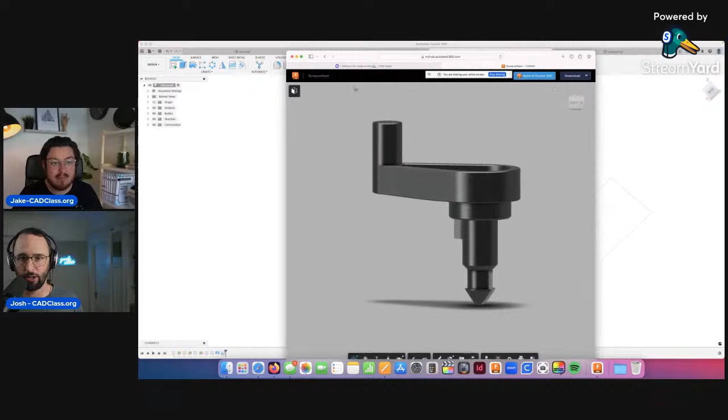Probably my favorite remixed project that we have is the geocache hide—we shouted a geocache hide out last week, a hide container. For those who don't know, geocaching is a worldwide GPS-based game: people hide these little geocaches everywhere and put the coordinates online, and other people try to find them. It's like a worldwide treasure hunt. There's usually very local stuff—about one every square mile on the planet, so there's likely 100 in your city. But people will also go on hikes to different countries, into the middle of nowhere, because at the very top of a mountain there's a geocache. It's a good reason to go out and explore nature—such a cool idea. You feel like Indiana Jones doing it in the middle of nowhere. So check that out—actually, scroll up a bit, because we have these knurls.

Look at these knurls, this is basically a 3-dimensional knurl. So cool, these look incredible, awesome. This was Vasil - not sure how to say that. That's the second time we've mentioned this person. They were the ones who did the little video tutorial helping somebody else out.

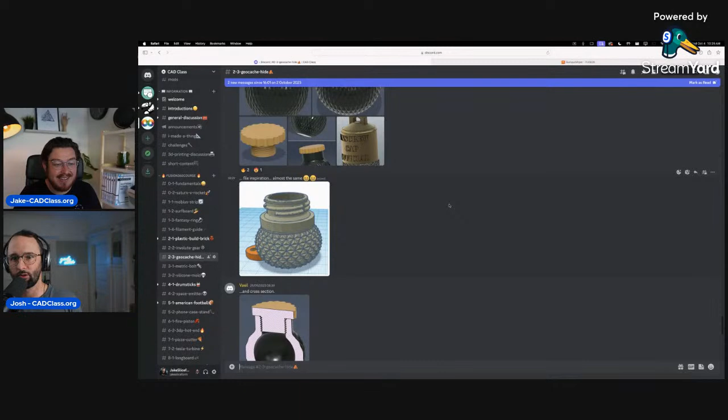This is such a cool container - looks like a little grenade, so maybe there's an issue there. But that's awesome, so rad. I like that you took the time to make this look a little bit better and cleaner. I like the cross section too, that's a lot of fun - you can see the cavity inside. But this last one was what made me say amazing knurls.

Yeah, show us your knurls. PC Van Vliet, amazing knurls. Hashtag show us your knurls. That's just cracking me up.

And then we had this Connie - yeah, Connie, printed by Geocache. I checked that out, love it. Thread fits perfectly, so I think this is meant to be hidden on a traffic sign. How cool is that? And they put the geocache logo on there.

So one of the things with geocaching is the people that aren't into geocaching, they're called muggles. Anytime you're geocaching you have to be kind of cool, kind of casual - you can't be super obvious, or else muggles will go over and pick up this random container and go 'what the hell is this?' I have a geocache that I've put maybe a few hundred feet from my house, and anytime I get a notification that someone found it, I like to lean out my window and see them and wave at them.

I've done a better job at hiding it now, making it easier for geocachers to find and be in and out of there. But in the same location not long ago, it was a little harder to find, a little bit behind something. And the cops got called because some of the neighbors thought people were planting drugs.

So if you're doing it in a residential area, make it really easy to find, so it's quick to grab and then you're off, because if people hang around for a long time, people get suspicious. That's hilarious - but then they printed it, and I love this. Moral of the story: if you're making a geocache, put a little sign saying this is an official geocache, this isn't drugs, this isn't a drop - and this is the logo. Check out how clean this is too, the 3D print looks amazing. This is just a lovely print.